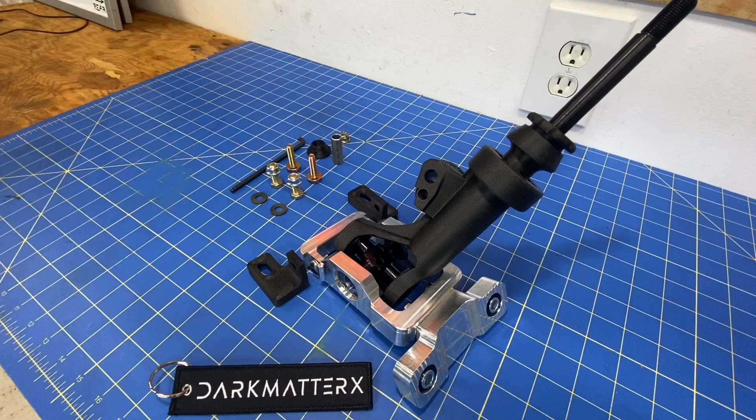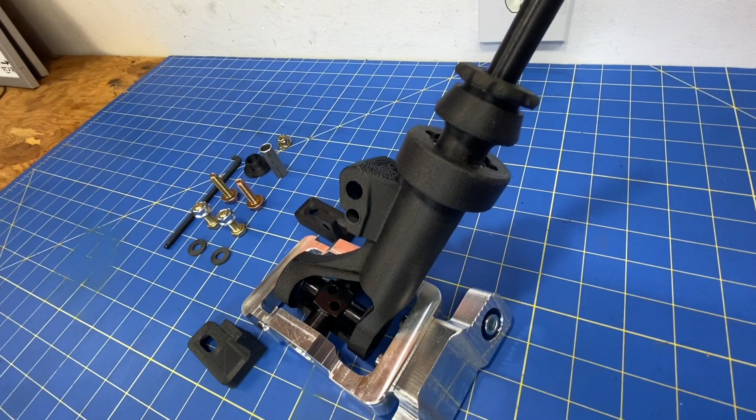You're looking at one of the prototype DarkMatterX billet and 3D printed shifters for a GC8 Subaru Impreza. These shifters will be available this fall for multiple body styles, including newer Subaru Imprezas. I'll be installing one of these prototype shifters in my 1998 two-door coupe RS. In today's video, I'll walk you through the first step of the installation, covering all the parts and pieces of the shifter, how it gets installed, and removing my stock OEM shifter assembly. In the next video, I'll walk you through installing this new shifter assembly in my 98 RS.

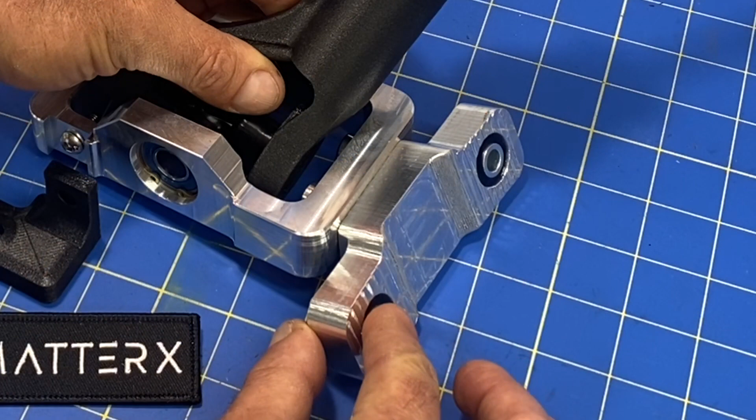Let's dive into how the shifter actually functions. I have it oriented how you'd have it in the vehicle. This is the back side of the shifter, and this is the front side. As you can see through these two little mounting holes, the shifter bolts into the vehicle at these rear two mounting locations.

The front half of the shifter uses these 3D printed little brackets. These brackets get bolted to the shifter through this little screw, and then we use them to bolt the front half of the shifter to the Impreza body as well. That way, no parts of the shifter are bolted to the transmission itself—it's completely bolted to the body and interior cabin of the vehicle.

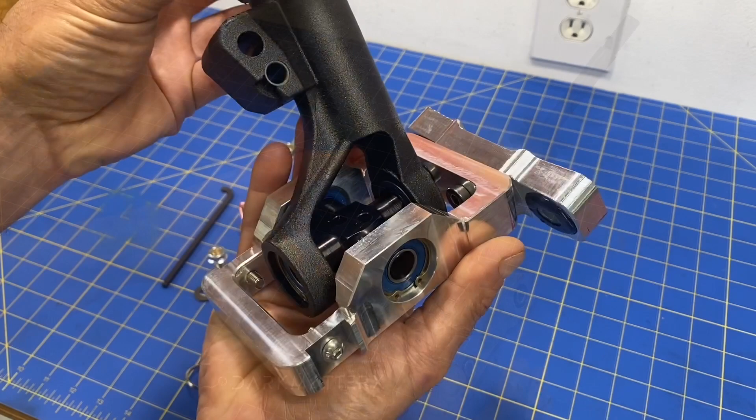If you look a little closer, the rotation and pivoting actually happen from two different bearing axes. This shifter assembly uses two different axes with needle bearings, giving it an incredibly buttery smooth shifter feel but zero play.

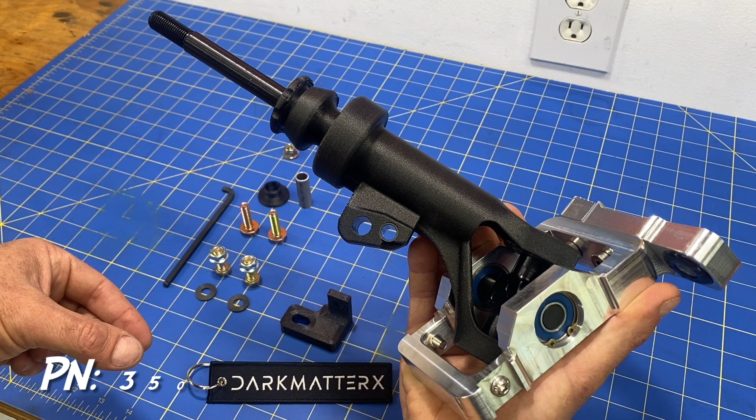The way this whole shifter assembly works is that this lower billet assembly installs to the vehicle body like I described, and this little hole is used to connect one of the STI 6-speed shift arms to the transmission input shaft. That's one of the upgrades you have to pick up if you're going to install one of these DarkMatterX shifters—you have to get one of those STI 6-speed shift arms. I'll pop up the part number for that right now.

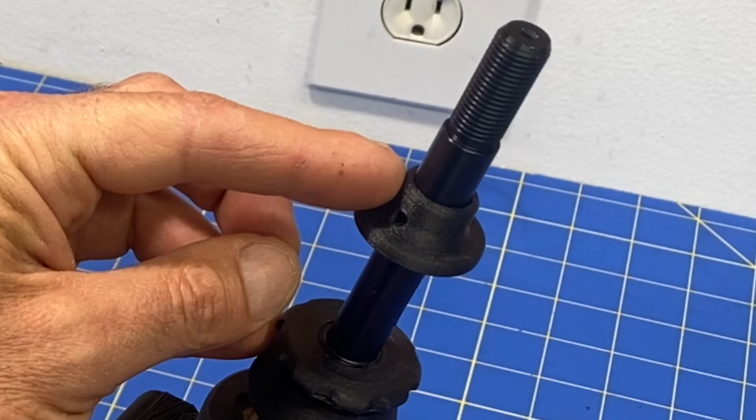As far as the rest of the components in this kit, this little collar is used with the STI 6-speed for the reverse lockout. It slides over the main shaft and connects to the cable for the reverse lockout. But I don't think I'll need this for my installation, since I'm installing the shifter on a WRX 5-speed from a 2002 through 2005 WRX into a first-gen GC Impreza.

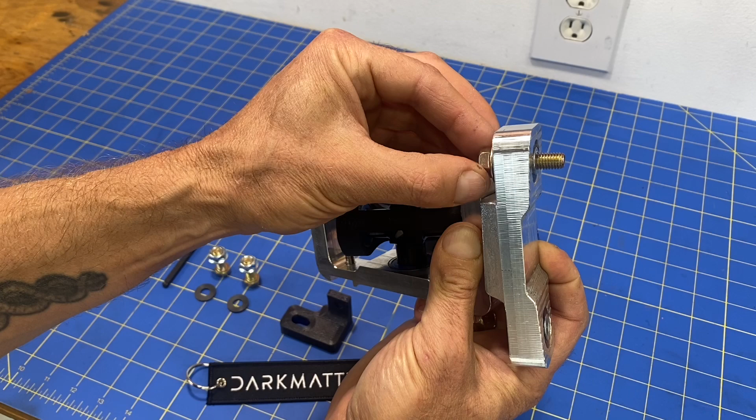These two bolts are used to install the rear part of the shifter base—they go through this base and then screw into the vehicle body from underneath. These two bolts and nuts are what you use to connect these brackets to the front half of the shifter, bolting it up into the body of the vehicle.

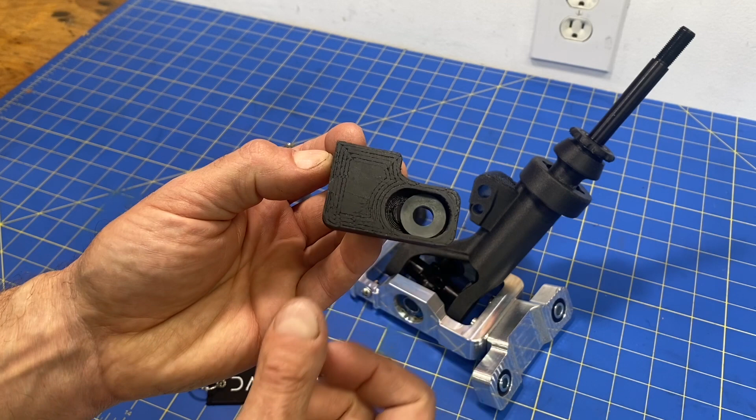These little washers go along with those bolts and nuts I just showed you. They're the perfect size for this carved-in inset section, which gives you a bit of adjustability to get the perfect mounting location for the shifter in your vehicle.

This shifter assembly also comes with a short stubby Allen wrench, needed to tighten the bolts once the whole assembly is installed in the vehicle. That's the way the manufacturers recommend it: install everything slightly loose so you can get it threaded and started, and then cinch everything down at the end. That's what this short stubby Allen wrench is for—to cinch these Allen screws down at the end.

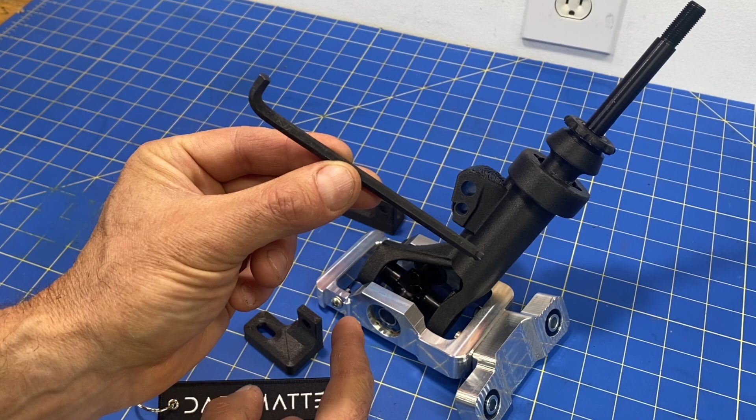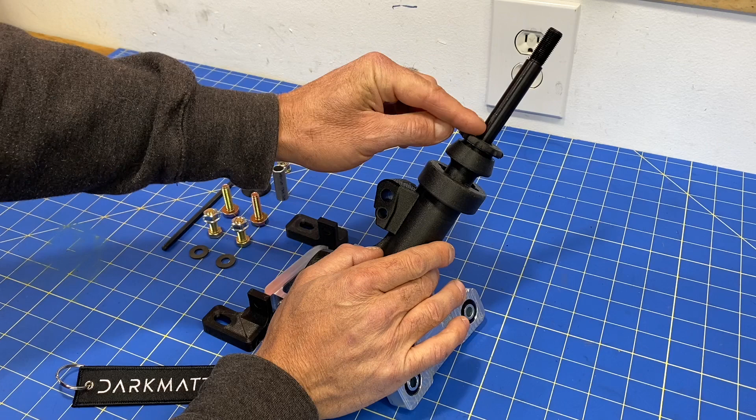Now, one final thing I'll mention that's really a pretty cool design feature on these shifters is that you can actually extend this arm, this main shifter arm, up or down just by rotating this little 3D printed part right here. When you spin it, that'll slide that arm up or down, and when you slide that arm up or down, it actually changes the shifter geometry.

Basically, having this arm slid all the way to the lowest position will give you the shortest throw, which is the fastest throw, but it will require a little bit more force. And as you bring that rod up, it'll change the geometry so that the shifter becomes easier and easier, but the throw distance becomes longer, so it actually takes longer to shift the gears.

And that's basically your trade-off. You can have an easier shifter that has to travel a further distance because of more leverage and torque applied to that shifting, or you can have a shorter throw, which is a quicker throw, but it requires more input force to shift that gear.

And what's really cool about this design is once this whole thing is installed and bolted into the car, you can actually adjust this throw by rotating this little knob right here, and it'll bring it up or down, so you can fine tune exactly how much force you prefer and exactly what the distance and length of time is for each shift.

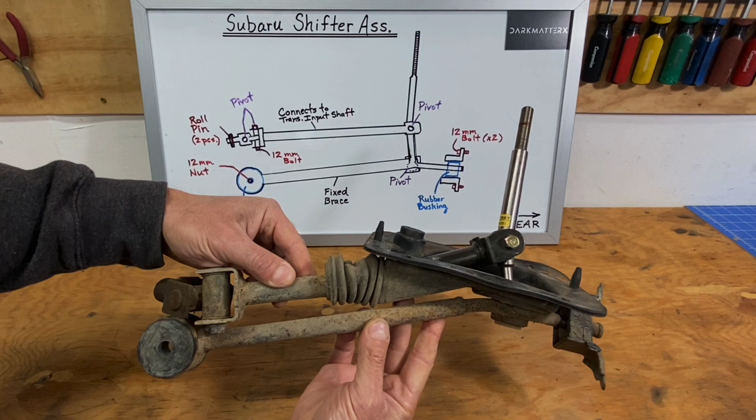Okay, this is one of the stock shifter assemblies that we'll be removing from my 1998 RS. But before we go ahead and remove this from the RS, I went ahead and made a diagram up on this whiteboard so I can walk you guys through all the locations where we're going to need to remove components from the shifter, and so you can get a better idea of how this shifter actually functions and how it's designed to work.

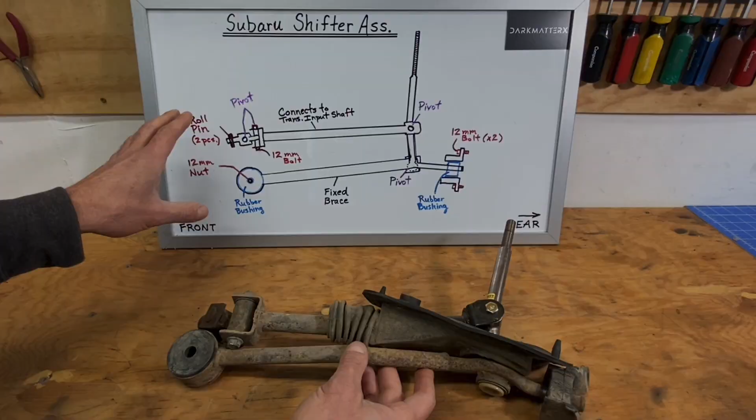Okay, you're looking at a whiteboard diagram breaking down how the stock OEM style Subaru shifters work. I've basically labeled all the main components here, and I'm going to walk you guys through that real fast first. Basically, these stock style shifters use two different rods and then a main shaft right here with a couple different pivot points.

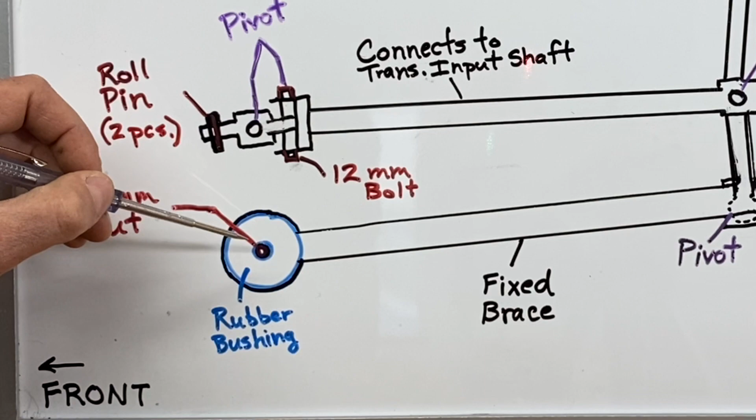The way they're designed is that the lower rod is basically a fixed rod, and they use rubber bushings on both sides of that rod to kind of insulate it from the vibrations of the transmission and the vehicle, because this side of the rod is actually attached directly to the transmission. And then this side of the rod is bolted to the vehicle body right underneath the driver's compartment.

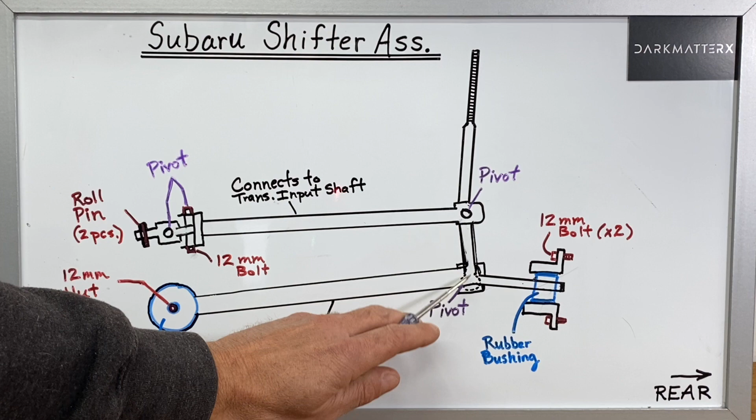There's a pivot point right here where this shifter is allowed to pivot slightly. And then there's a pivot point right here that goes to this second rod that actually sits above that first rod. So the second rod is the rod that connects to your transmission input shaft.

It actually connects right here through a roll pin. There's a transmission input shaft that continues all the way over here, and this rod pushes that transmission input shaft in or out or rotates it. That's how you select different gears in your transmission. So this is the main rod that's doing all that gear selection.

And as you'll see here, there's a roll pin. It's actually a two-piece roll pin, and I'll talk about that later in the video, but that's going to be one of the pieces we need to remove to take this stock shifter assembly out.

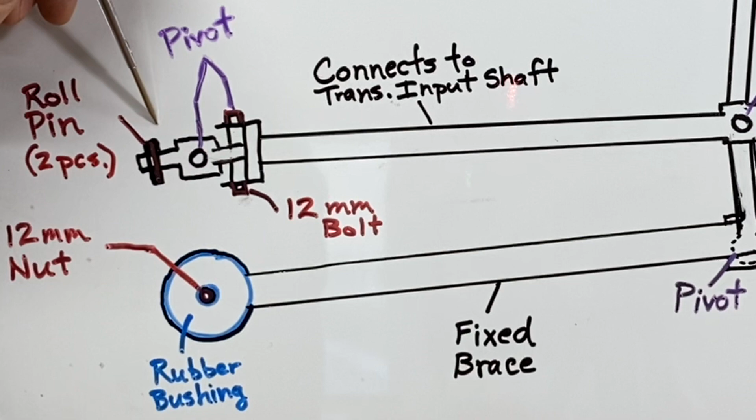There's also a couple pivot points here that I've called out in purple, a pivot point down here, and a pivot point right here that I've called out in purple. So all the purple is the pivot points, and the red is the hardware.

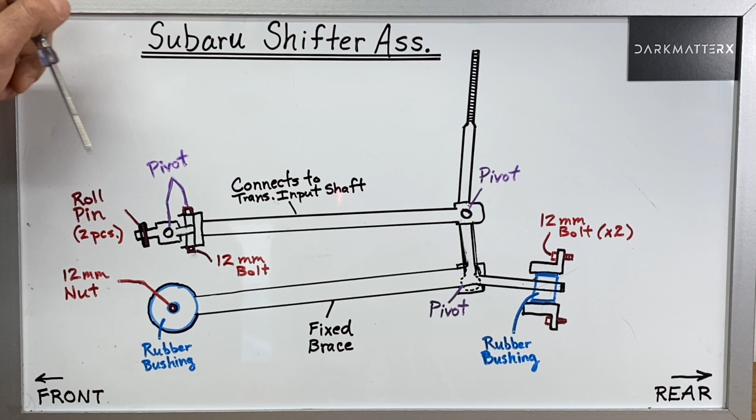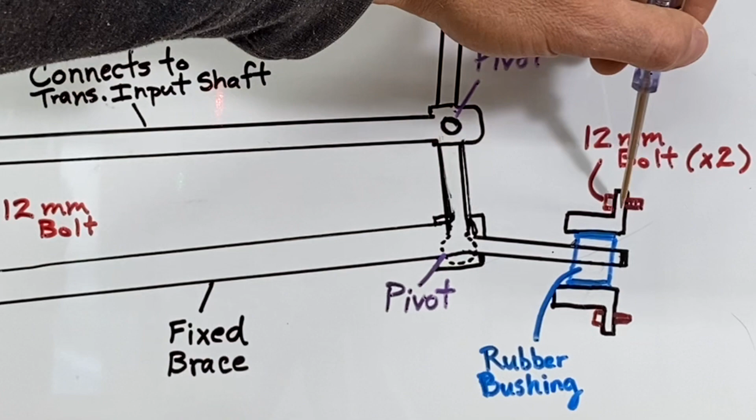So I've got a roll pin right here that's a two-piece. There's also a 12mm nut that's attaching to this rubber bushing and this lower fixed brace arm. And then over here, you'll see I have two 12mm bolts that you need to remove, and those are underneath the vehicle in the rear of the shifter assembly. To remove this shifter assembly, there's actually only 4 locations you have to worry about.

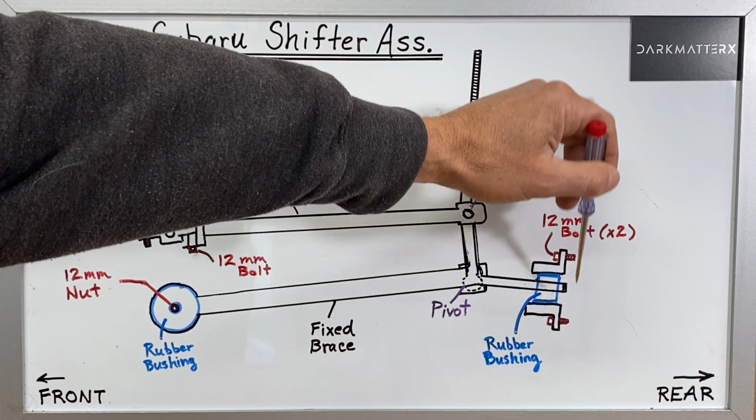You have to take this 12mm nut off this lower brace. You also have to take these 2 bolts off the back half of that lower brace, and that's actually a separate little piece that has a rubber bushing in it as well.

And then you have to take this roll pin out of this kind of U-joint assembly for the upper rod. Once you've got all 4 of those locations removed, this shifter assembly is basically completely disconnected from the bottom half.

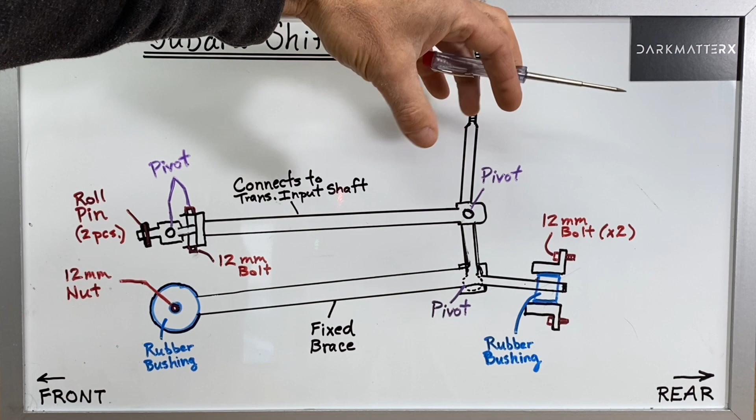Now there's actually a rubber boot that gets attached to the top half through the cabin of the vehicle, and it's got a bunch of Phillips screws screwed in from the interior cabin holding that rubber boot down. So after you remove those 4 locations from the underside of the vehicle, you still need to remove those 6 Phillips screws from that rubber boot from the interior cabin.

And that's basically how these Subaru shifter assemblies work. The lower rod is fixed, the upper rod connects to that transmission input shaft and selects your gears, and then this is the main gear shaft arm where your gear shift knob actually screws down onto.

Okay, so let's head over to my 1998 RS and start removing this stock shifter assembly.

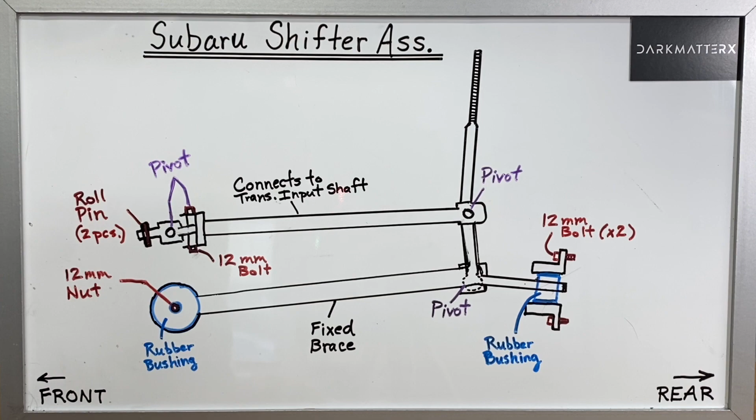Okay, so step 1 is to remove that stock OEM shifter. As you can see, I already have the car up on jack stands, and the first step is to go ahead and remove all the components on the interior of the cabin. So basically, removing this stock shifter is going to be kind of a 2-stage process.

The first stage is going to be in the cabin, and that's going to be removing the center console and then removing the shifter assembly and all the fasteners on the top half here in the cabin. Then I'll get underneath the vehicle and remove the fasteners from those 4 locations: 2 bolts on the rear of the shifter assembly, another stud nut holding one of the rods, and that roll pin holding the U-joint assembly.

That's basically the game plan: remove the center console, remove all the fastener stuff on the top half, get underneath the vehicle, remove those 4 fastener locations underneath, and then pull the whole shifter assembly out through the top here in the cabin.

Like I said earlier, the first step to removing the shifter assembly is to remove the center console. Once you remove it, we can get access to the shifter assembly and remove all the surrounding trim that's actually holding the shifter assembly down from the top half.

Removing these center consoles is really pretty easy, but I'm going to walk you guys through it one more time. To remove this center console, the first step is to open this console lid, and then peek in here.

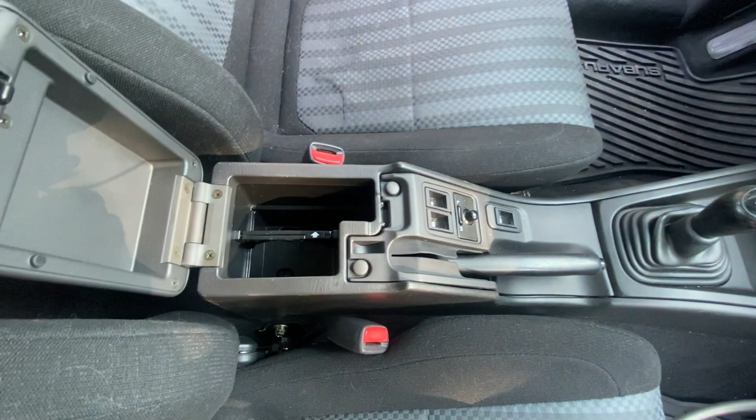You'll see there's actually 2 or 3 screws holding this console down. So remove those 2 to 3 Phillips screws first, and then go ahead and pop these little caps off and take out these 2 Phillips screws as well.

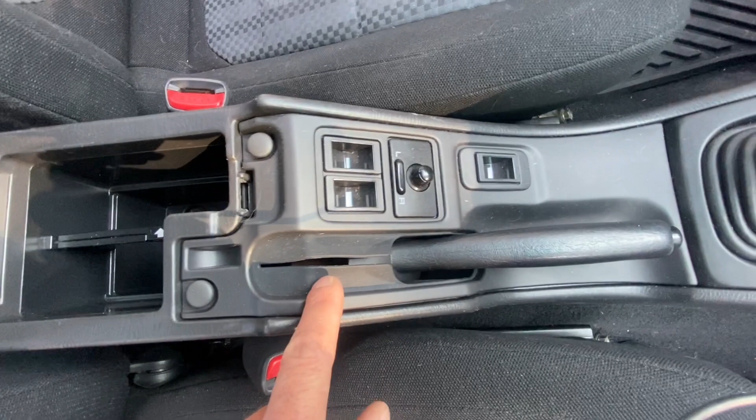These 2 Phillips screws are holding this e-brake shifter surround piece in place. I'll show you guys that right now.

Whoops, make sure you don't lose that sucker.

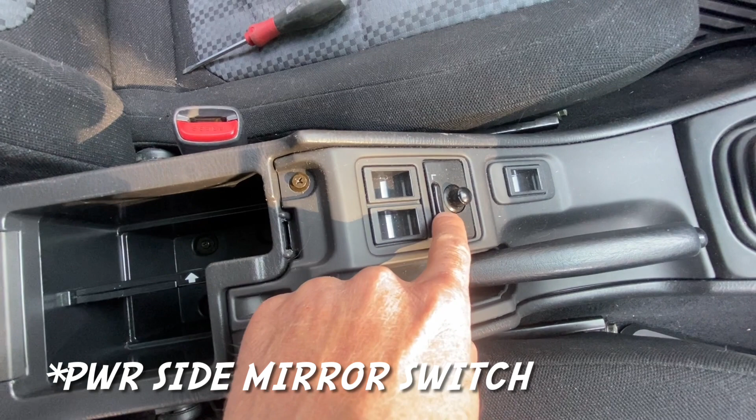Once you remove those 2 or 3 screws down there and these 2 screws right here, you should be able to pop this e-brake surround out and disconnect the little power side mirror switch. Then after we get this e-brake surround piece out, we'll move over to the shifter surround.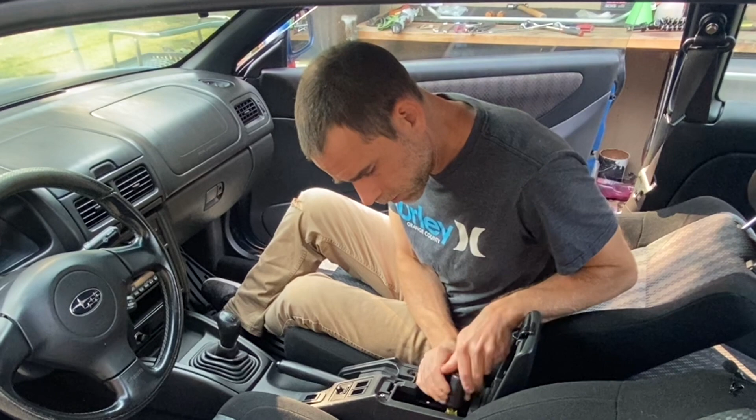Alright, so I'll start with removing these 3 screws from the center console, right here in the inner little cubby area. Then go ahead and remove these 2 screws that are holding this e-brake surround in. You should be able to pop this e-brake surround up and out.

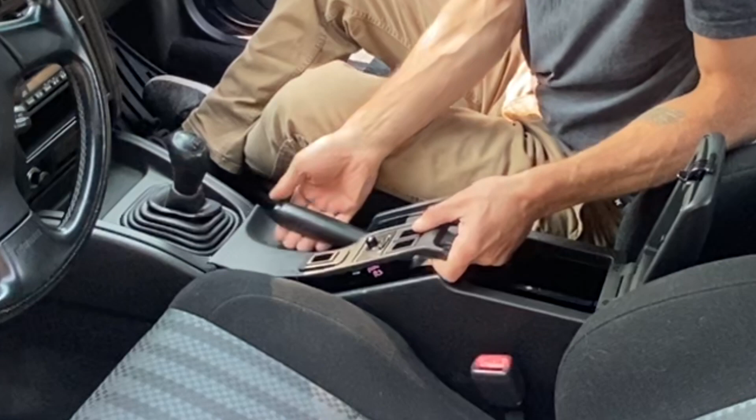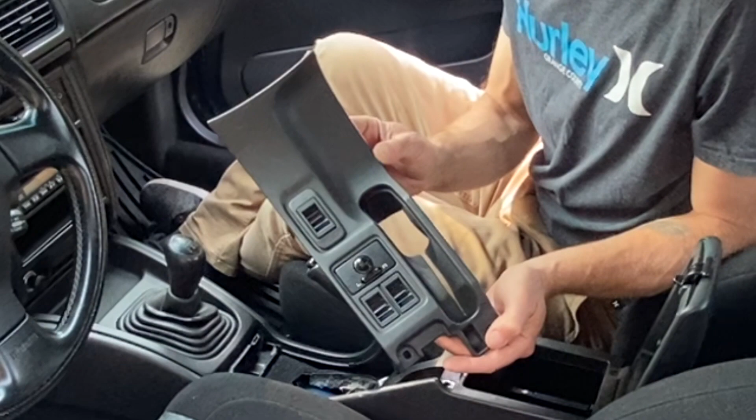You might need to lift your e-brake up slightly to give it some more clearance, and then you'd have to disconnect this plug. I actually don't have my plug for my power mirrors plugged in right now. So that's that first piece - go ahead and move that and set it to the side, and then we'll move over to the shifter and the shift knob.

So for the shift knob, you basically just want to push this rubber boot down and dislodge it from the little slot that it's sunk into. Then go ahead and counterclockwise twist the shifter off and just spin it all the way off. I'm actually using a later model 5-speed shifter currently because it has a really nice feel, and I really just like the OEM look.

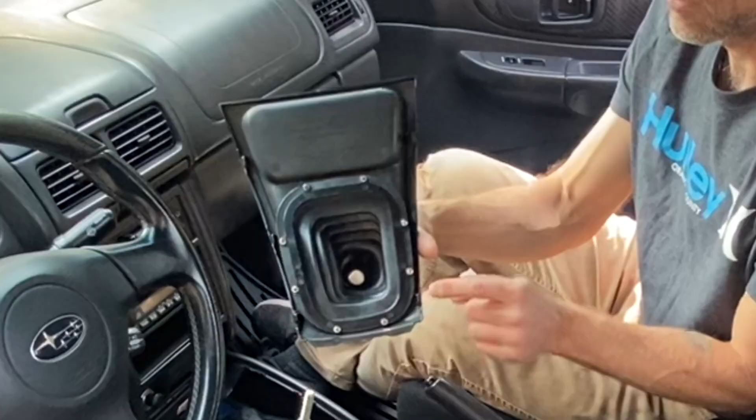Once you've taken that shift knob off, you can go ahead and pop this shifter surround out. Just get underneath it right here and pop it up from the bottom first, and that should allow you to pop it out easily without damaging it or any of these little clips on the bottom. There's actually 6 little mounting spots on the bottom right here - 1, 2, 3, 4, 5, 6. That is your shifter surround. Go ahead and set that to the side.

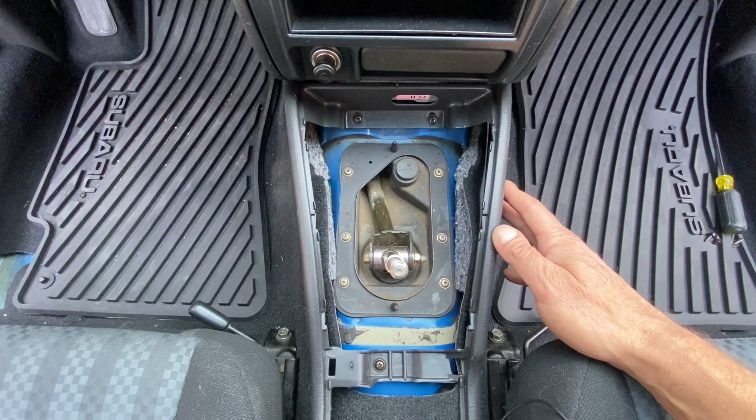Now that I have that shifter surround removed, you can actually access this entire shifter assembly without removing the rest of the center console. But I'm going to go ahead and remove the rest of the center console to give myself a little bit more access and make it easier to film this video for you guys. But if you choose to leave the center console in, which I believe you can, the next thing you'll do is remove this trim surround that actually holds the shifter in place. Go ahead and remove all 6 of these Phillips screws that hold this shifter surround in place.

If you guys have looked at some of the other videos from DarkMatterX, you'll know that this is where you actually have to trim the shifter surround - or at least that's my understanding from looking at the videos. This is my first time installing this in a GC, and there aren't any videos out there for installing this DarkMatterX shifter in a GC, which means I'll be one of the first people creating a video for this DarkMatterX shifter install in a GC body vehicle. I highly recommend you guys check out the DarkMatterX website or YouTube page and watch their video on installing this shifter in a late model STI. I believe they install it in a 2017 or 18 STI, but a lot of the procedures and steps will be very similar to what you need to do to install the shifter in a GC body.

Okay, getting back to the console, I'm going to go ahead and remove this console to give myself a little bit more room. To remove this console, the only thing I need to do now is remove this screw, and this screw down here - 3 more screws, and this whole center console should be able to be removed, giving myself a lot more room to film and work with this shifter assembly.

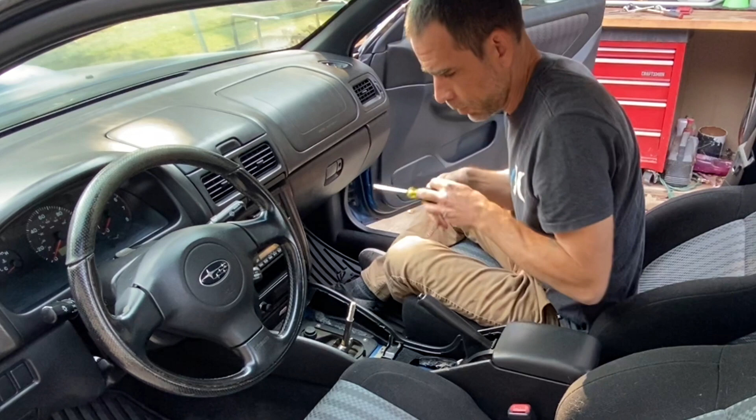Now, like I said earlier guys, you can actually leave this center console in, it appears. I don't think you need to remove this entire center console to do this DarkMatterX shifter install. But it literally takes 3 more screws, which is not very much at all, and then this whole sucker can come out and give you a little bit more room, which I'm going to go ahead and do just to make it a little easier.

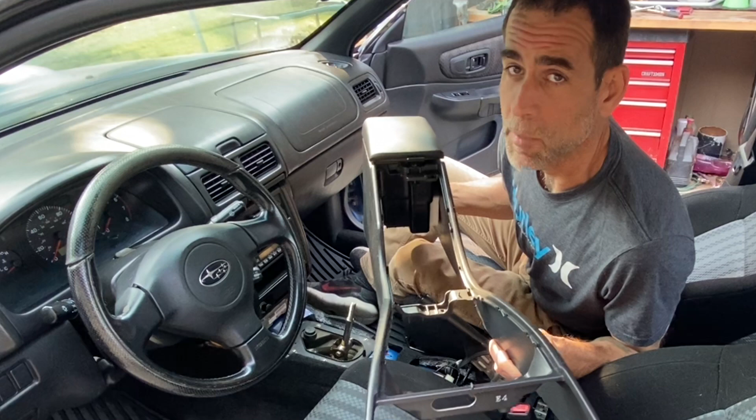Alright, and boom, just like that, our whole center console is out, and literally this should only take you about 5 minutes, guys. It's really, really easy on these first-gen Imprezas. That's one of the big reasons I love these GCs - in addition to them having so much character and great design, all the mechanical aspects of these cars are a little bit simpler and faster and easier to work with than the newer body styles. Okay, next I'll go ahead and remove these 6 Phillips screws.

Alright, and that's the last one. We can go ahead and remove this plate. Might be a little bit sticky, but don't worry about that.

We're going to go ahead and mark off exactly where we're going to notch this. Because, like I said earlier, that STI shift rod from the STI 6-speed is actually going to make contact with this metal plate in this region. So we're going to probably notch off this whole section of this corner. It's not really needed for any kind of structural support of the shifter.

Okay, now that we've got that shifter surround moved, this whole shifter assembly is basically completely disconnected from the top half of this vehicle. Next we'll go underneath the vehicle and disconnect this shifter assembly from the 4 locations that I talked about earlier.

There'll be 2 bolts on the back half of the shifter assembly that stabilize one of the rear rods, and there's actually a stud with a nut on it on the lower rod. Then there'll be a little U-joint assembly that connects to the transmission input shaft that the shifter uses to push forward and select a gear with. So let's head underneath the vehicle and get those 4 mounting locations disconnected next.

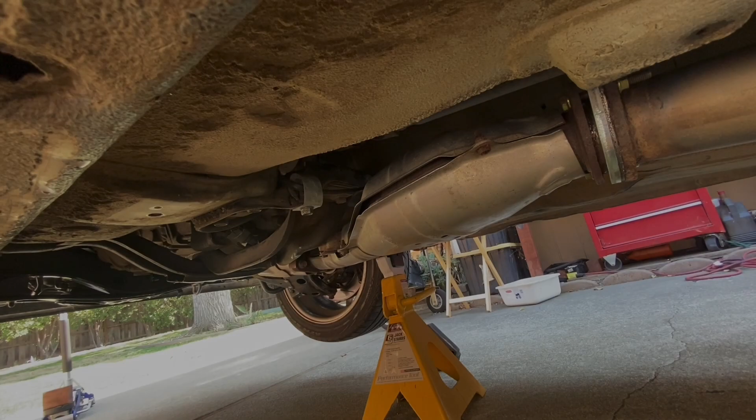Alright, so we're under the car and there are basically 4 points on this shifter that we need to disconnect to get this whole shifter assembly out. I'm looking up underneath here - you're basically looking at the drive shaft right there. This is the catalytic converter here in the foreground. And up there is the shifter rod assembly.

So it's basically a point down here. Let me see if I can reach underneath. There's a point right here that we need to disconnect, and there's a little 10mm bolt right there that we need to take off. And then I think this whole arm should slide off of this rubber bushing stud.

And then there's actually another little joint right there - it's kind of like a U-joint kind of connection. That looks like another 10mm or maybe 12mm. So we need to either take that bottom bolt right there to slide it out, or there's actually a roll pin behind it right there, and we need to pop that roll pin out to take that upper arm assembly out.

That's what actually connects to that transmission shaft that selects your gears by pushing it forward or backwards or rotating it to the left or right. So that's what we need to take out by either the roll pin or that little bolt. I think I'll probably take the roll pin so I get the whole assembly out.

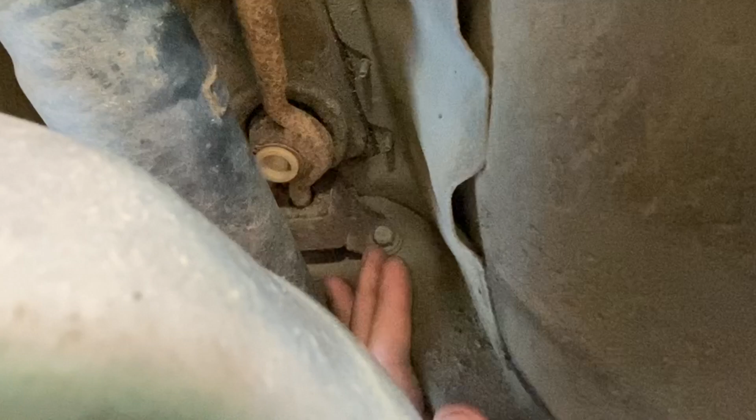And then here in the back, if I move to the back - alright, looking here in the back, you can kind of see this bolt right here. This is towards the back of the transmission. So I flip the camera around, looking towards the back of the car, and this bolt right here and another bolt on the other side in the same location - this is kind of a symmetrical piece with two bolts. You gotta take these two bolts out too. This is what's holding the rear portion of that transmission shifter assembly.

All right, for this first rod right here, this nut is a 12mm nut, and I'm just using an offset box end wrench to loosen that nut. An offset box end wrench gets in here pretty easily, as you guys can see. And I'll slowly just back this nut off.

And then I think this first arm will be able to slide off of this stud and the rubber bushing that it's attached with. Incidentally, this rubber bushing is one of the bushings you can replace with a stiffer bushing to get a little bit stiffer shifter feel if you're using all the stock shifter components. But of course, I'm actually using this aftermarket DarkMatterX shifter now, so we'll see.

I'm actually gonna use this stuff. Looks like I can get in there now and take that nut all the way off by hand. All right, got that nut off, bam. And I think this rod can slide out if there's some flexibility in it. No, it's still tight.

I think the next step I'll do is go ahead and loosen the back bolts, because these back bolts are what hold this rod in place. So once I remove the back bolts, I think this rod will slide off a little bit easier. I'm gonna go ahead and use a 12mm box end wrench or maybe a 12mm socket and get these rear two bolts off next.

Okay, I'm flipped around here towards the back of the vehicle, and I can get my box end wrench up here to get this 12mm bolt out that's holding the rear portion of that shifter. The rear rod is held in place with these two bolts, a little bracket, and a bushing. Not a lot of room in here though.

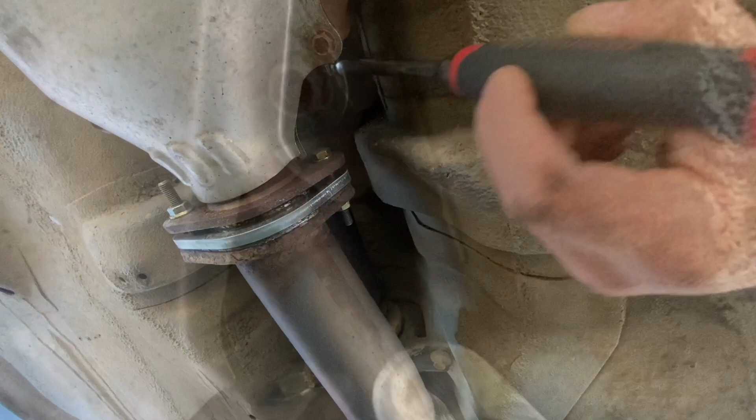All right, now I can get in there with my finger and take out the rest of this little bolt. Bam, got it right there. That's that little 12mm bolt right there. All right, I'm on the passenger side, still facing the rear, and this is that other bolt.

It's a little bit dark and hard to see because it's covered with mud, but you should be able to get in here with a ratchet and just back that bolt off. I got a flexible head ratchet with a long socket, 12mm. As you can see, it's really tight in here, especially with the drive shaft right nearby where this thing is.

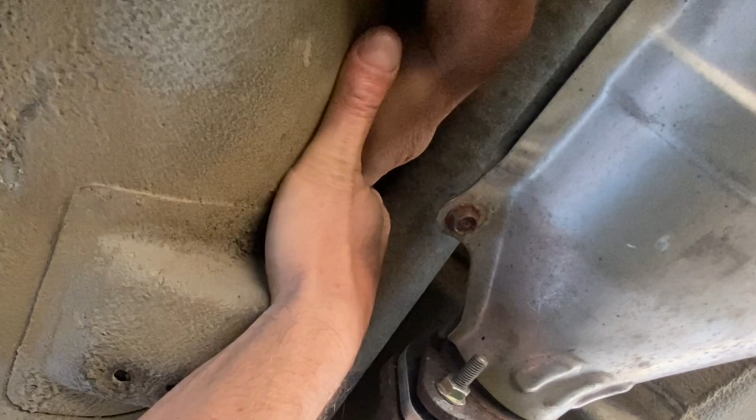But you can get in there and you should be able to loosen it up. You can even get a hand in there. It's tight, but once you loosen it, you should be able to get your fingers in there. I'm completely covering the bolt, but I'm getting in there with two fingers so I can get that little bolt out. Bam, like that. And we have both bolts out of the back of the shifter assembly.

So that front rod, the lower front rod, should be able to be slipped off now. Okay, as you can see, I got that little stud off.

Basically, after you get the nut off, there's a little metal plate and you have to slide that plate off. My plate was a little bit wedged on this stud, so I had to use a flat blade screwdriver to work that plate off. Once I slid that plate off, I was able to slide this rod off in that rubber bushing.

So after you get that plate off, you should be able to slide this rod off that stud and push it up and out of the way. But I'm also gonna remove this little U-joint assembly by popping that little metal roll pin out of that shifter input shaft.

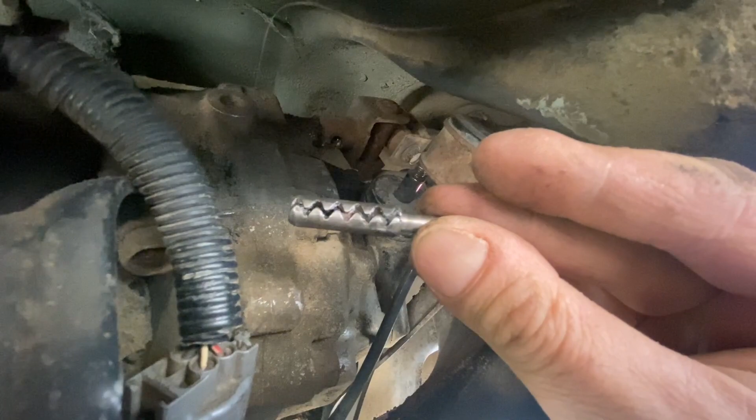Okay guys, this is a roll pin assembly. This is actually a two-piece roll pin. There's a smaller inner diameter roll pin right there, as you can see on the right side, and then there's a larger roll pin. Right now the smaller one is still stuck in the larger one slightly.

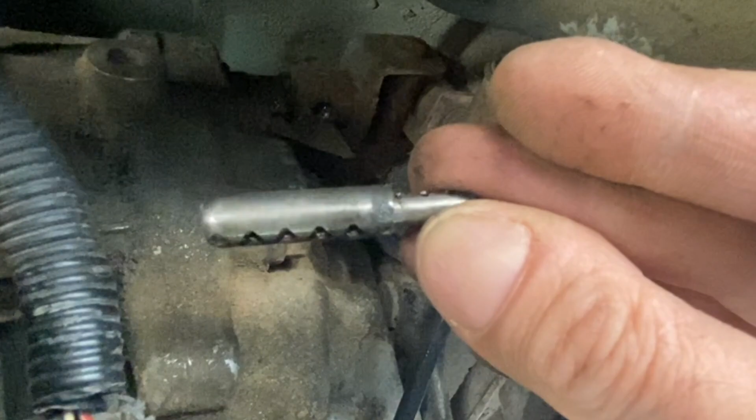So basically you need to pop out that smaller one first, and then you can pop out the larger roll pin. Real fast, I'll mention there's a quick little tip for getting these roll pins out.

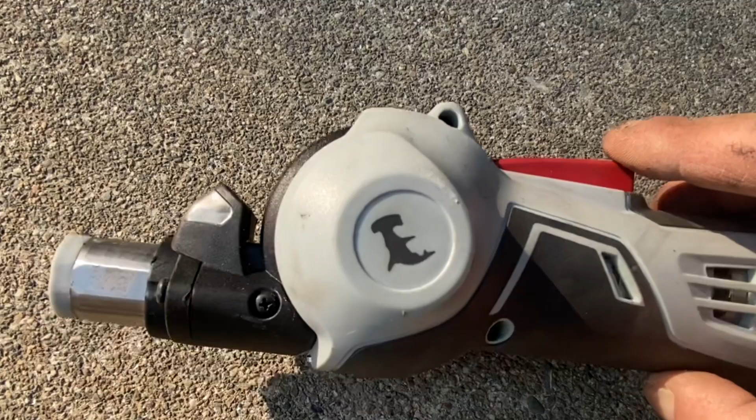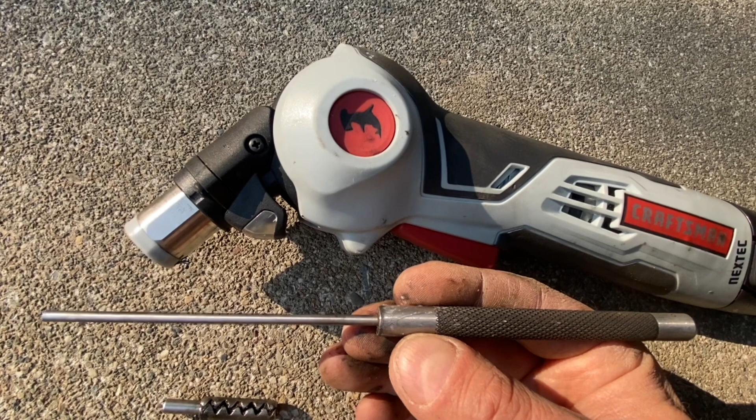I actually like to use one of these little vibrating tools. This is a vibrating nail installer from Craftsman. This one has a pivoting head, so you can pivot the head by pushing this button. And when you push this little button, there's a little vibration that takes place on the inside. Basically, this little nail installer with a small vibrator and a drift like this works perfect to take these little roll pins out. It literally pops these roll pins out in like 2 or 3 seconds.

You just gotta have the right size drift and one of these little vibrating nail installers. I use this one because it has a pivoting head, so you can get up underneath at the exact angle you need, hit the button, and it vibrates that little pin right out using that drift. Works great every time. You can see the hole right there where the roll pin came out.

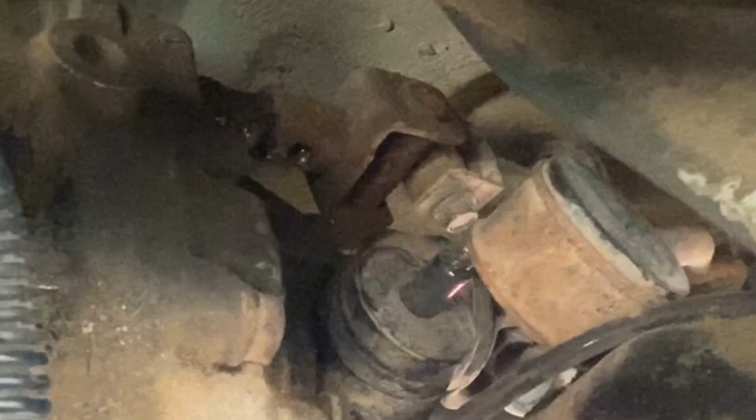Now that we have all 4 of those points unbolted and disconnected on the bottom half of the shifter assembly, we should be able to go into the cabin and remove this entire shifter assembly through the top. Once everything's disconnected underneath the vehicle and this shifter assembly is completely loose, we should be able to remove it from the interior cabin.

So go ahead and kind of work this sucker back. We're just gonna basically pull this back piece out first, I think. Let's see here.

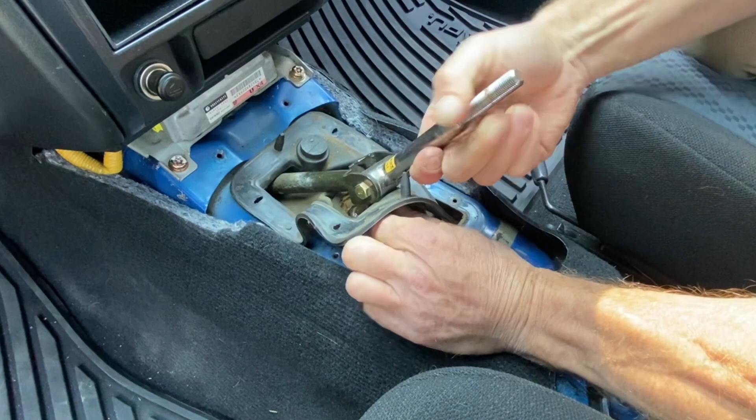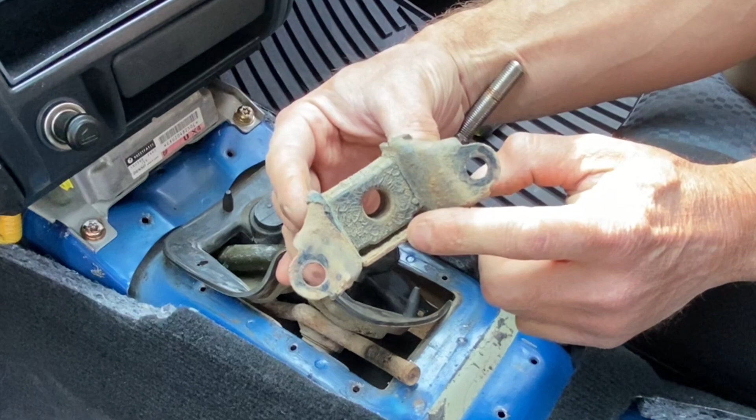All right, this is that rear stabilizing bracket with that little rubber bushing. A lot of aftermarket suppliers sell upgraded versions of this with a polygraphite bushing, because this rubber bushing gets softer and softer over time. I can actually squeeze it with my thumb and feel how soft it is.

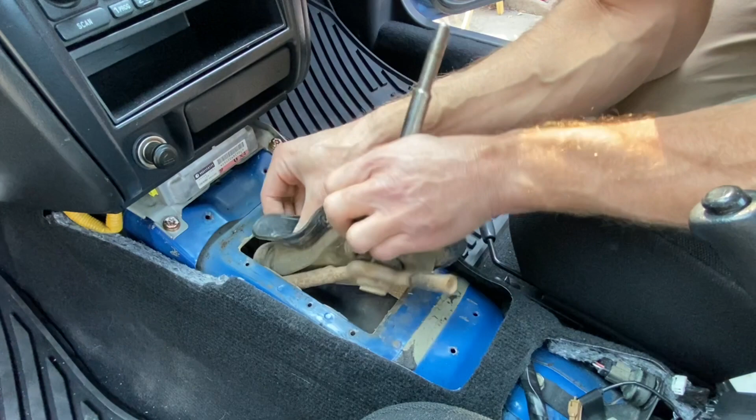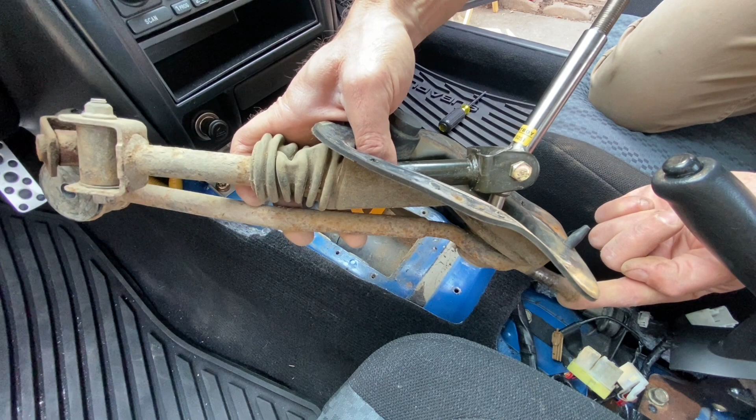All right, since I have all the different points on the bottom disconnected, you should be able to pull this sucker out completely. And there we have it - the entire shifter assembly pulled out through the top half, through the cabin of the vehicle. Once you have it disconnected from those 4 mounting locations on the bottom, and disconnected on the top half with that plate, it's really pretty easy to slip this sucker out through the cabin.

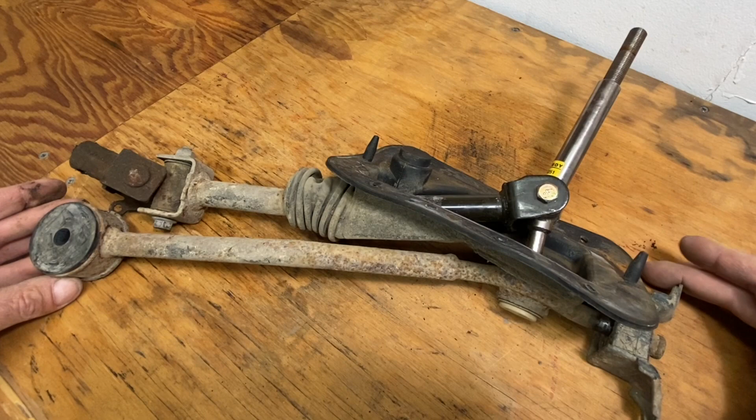Just taking a closer look at it and orienting ourselves, this is basically the rear of that shifter assembly. This is where we had those 2 bolts that bolted in underneath the vehicle with those 12mm bolts. This half on the left here is going to be on the front of the vehicle, and this is that lower one that goes over the stud. There's a 12mm bolt I had to unscrew underneath the vehicle.

And this is that U-joint that had the little roll pin. I used a little vibrating hammer tool to pop that roll pin out, and once you pop it out, there's the hole for the roll pin right there. Once that roll pin is out, this little U-joint apparatus slides right out. Incidentally, this U-joint has a bushing in here that wears over time, so it's definitely a good idea to replace this little U-joint when you replace or upgrade your shifter assembly.

Like I mentioned earlier, there are companies that sell polygraphite bushings for your stock shifter assembly. When you buy those, a lot of times you're getting a bushing that goes in the back and one up in the front. When you do that, I definitely recommend you replace this little U-joint as well. So that is a stock OEM shifter assembly.